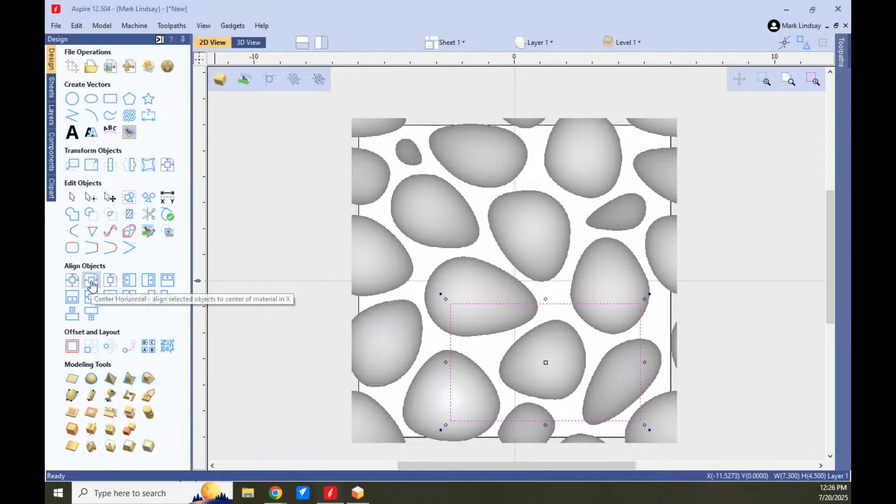Close that rectangle, and I'm going to align it to the center of my material horizontally. Now I can come down into my modeling tools in Aspire, go to the third row, second icon, to clear the area of selected components. I don't want to go outside the vector, I want to go inside the selected vector. Third row, first icon, make sure I have my rectangle selected and click that.

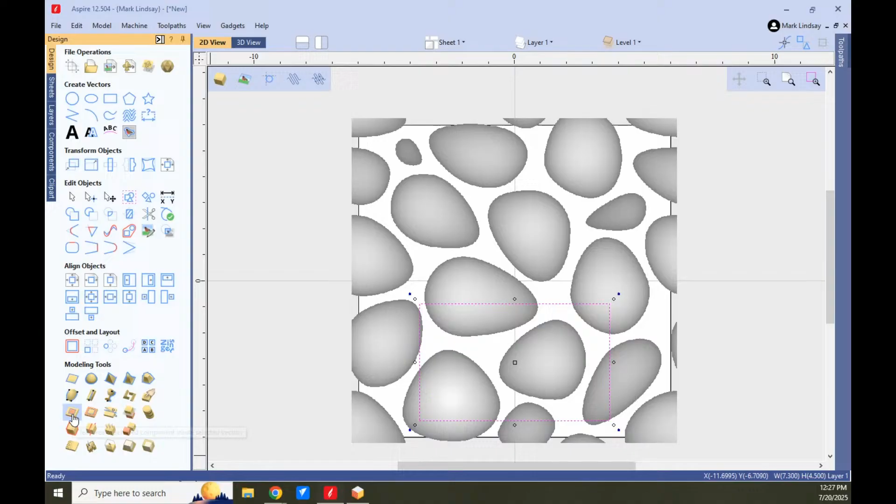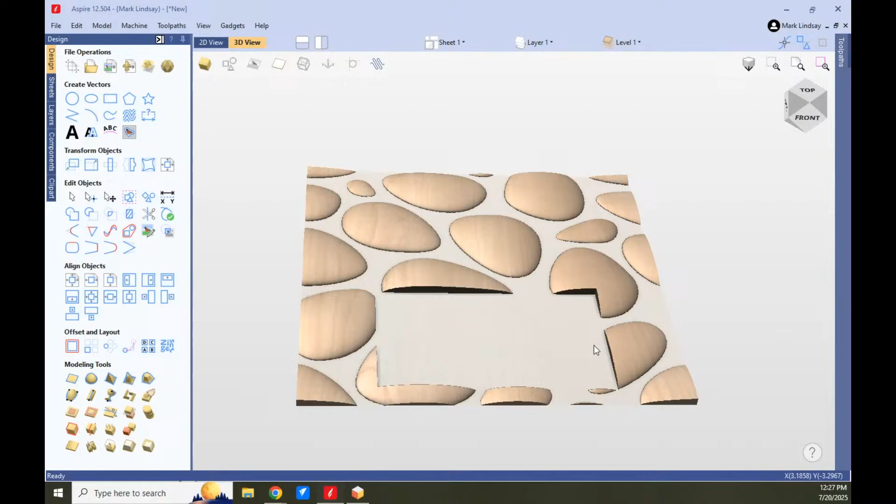I have to select the model first, then hold down shift and then select the vector, otherwise it doesn't know what to do. Then that'll clear the model inside that vector. So now when I look at it in the 3D view and turn off my vectors, that's what I've got. From here, you might want to do a little bit of sculpting to clean up rough edges, but that's how you can use a background and then eliminate a place within the model.

Now, because you're using Aspire, let's go back into the 2D view. We'll select that vector again, and we'll create a flat component here inside this vector. Let's see, what's my height here?

My height is 0.24. Let's go ahead and make this 0.25. Well, that's 0.27, that's 0.28, 0.29. Let's make it 0.29 - we'll make the base height 0.29. And we'll add, because there's nothing there, and we'll create, close.

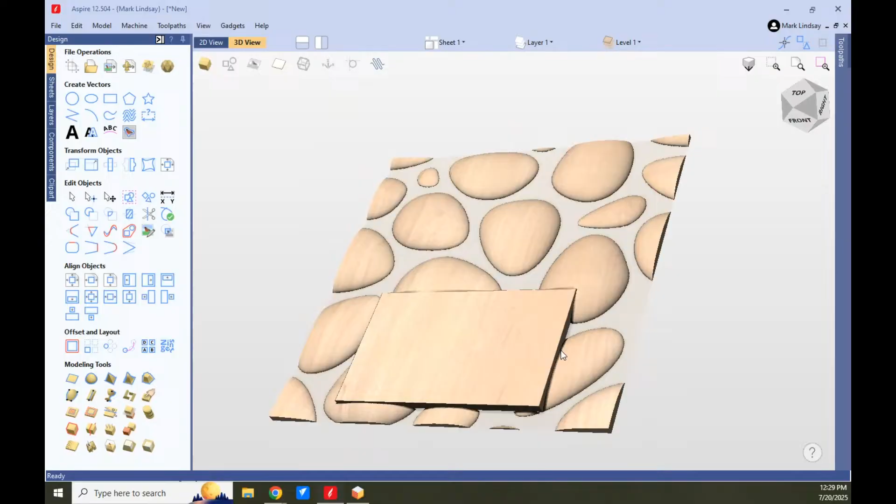Now look in the 3D view, and I have a flat area. I think I'd play with that a little bit, but you get the idea. So you could play with that to blend it in here and sculpt a little bit. I think that's what you were asking about, that's what I got from your question, but you can definitely work with that and play with it.

I see here Brooks Martin saying he likes the blue mode of view. Brooks, you come up here to edit, go down to options, scroll down to general settings here in the options, and come down to theme. You have the drop down menu here, mine is set to blue. You click the drop-down menu and they also have the white default, white/gray default. I've selected the blue theme just because I prefer it - I like the higher contrast up here. That'll get you the blue theme like I have. These icons are shaded in blue, and you turn them on and off.

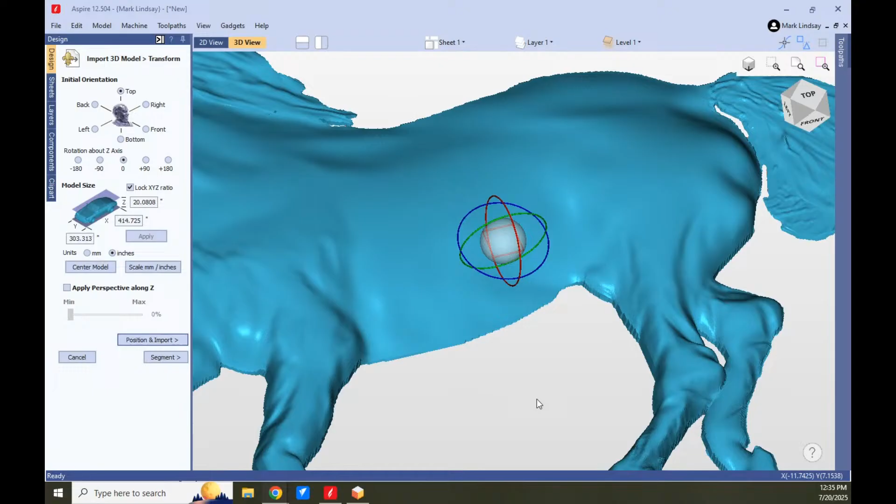So we're looking at the top surface of my material, and we can see that this horse is imported nice and flat. And that's what we want. That horse is nice and flat. We want it to be on the surface of our material.

Let's just say, for the sake of argument, the horse got imported like that. Well, now we've got to come around here and just click on these orientation points to get it to where it's lying flat and parallel with our material surface. Just so happened that our top orientation, we've got it the way we wanted it. Now if you want to fine tune that a little bit, that's when we use these rings here. I'll get into those in just a second.

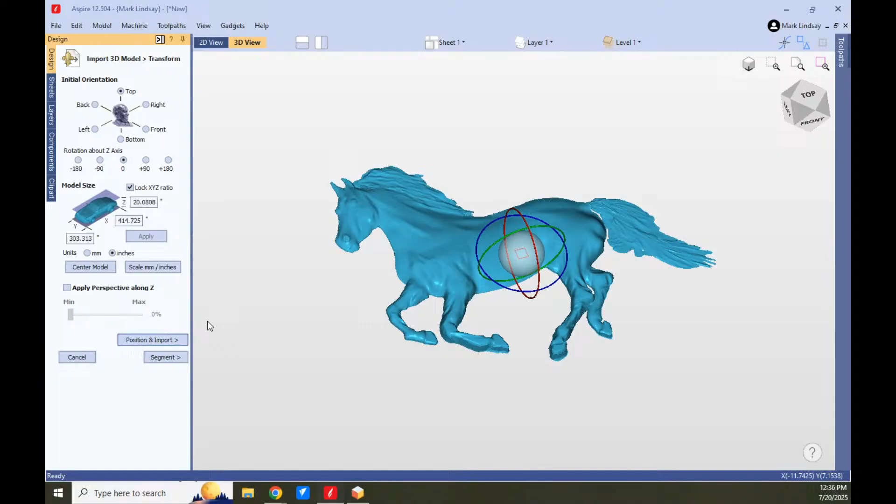The next thing you want to look at is the model size. Now we can look at this: 303 inches in Y, 414 inches in X. I can tell you right now, this was saved in metric, those should be millimeters. So Vectric knows this is a common occurrence, so they gave us a button, scale millimeters and inches. So now I just click, and we're sized. It took those measurements and we're sized in inches. Okay, that helps a lot.

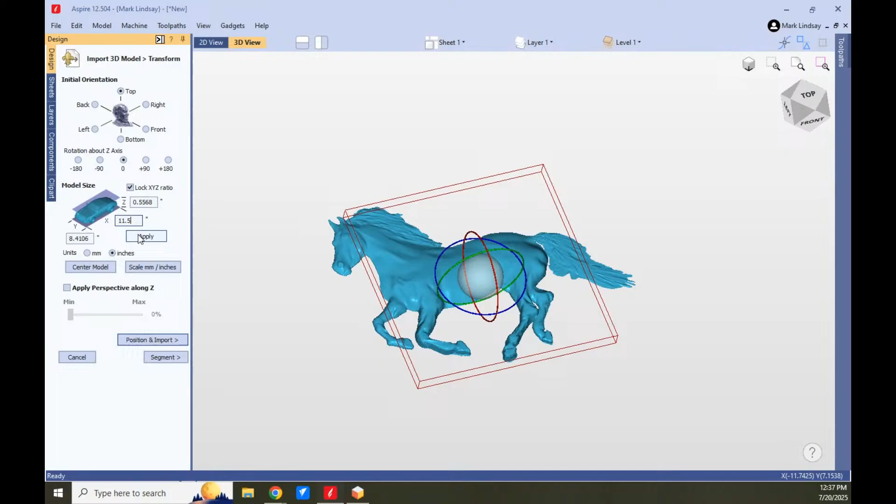Now I want to size it to where it will fit in my material block. My material block is 12 by 12. I want to make the biggest measurement down here 11 and a half. So I'll go to this one here and make this 11.5. Now that has sized everything down. I'll click apply and we have it sized to fit in my material.

Now, if I look at this straight from the top, we can see the horse is kind of rearing up a little bit, but not much. This is where we can do a little bit of adjusting here. Let's say I want that horse reared up a little bit more. I can take this ring, click on it, and drag it. And that rears that horse up just a little bit more. All I did was click on this ring and drag it.

Or I can click on that ring and enter a value here. It's currently at negative 15. Let's go with negative 20 and hit enter. That reared that horse up just a little bit more. So we've got that going, everything looks good there.

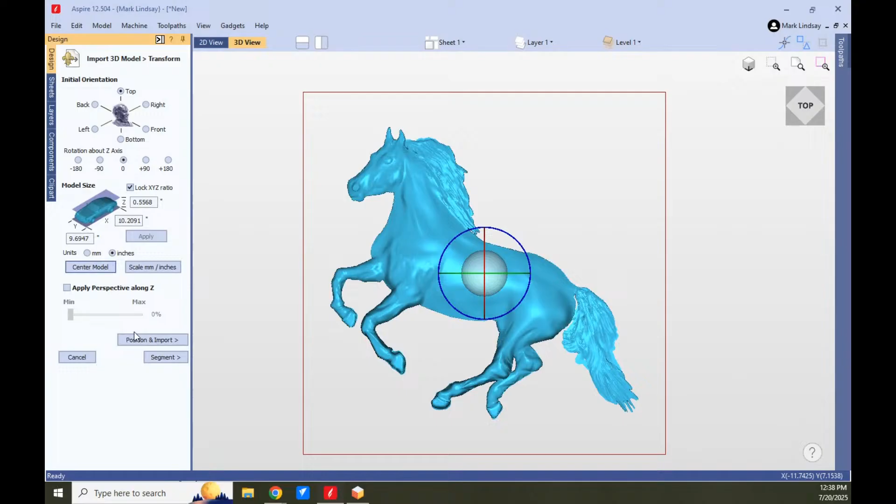My size is okay. I'm going to center the model now, and that centered him vertically and horizontally. And now I'm going to go into position and import, so I'll click into position and import. Now if I take a look at this just as it is right now, we can see that we've got some bright blue in focus.

Then we've got this purplish gray plane right here. In this view, they're calling it a zero plane. This is technically the modeling plane. This decides what is going to be imported, what's going to be visible. We can see over here in this diagram it is, by default, set that plane to the center of the model because it doesn't know what we want to import. I'm going to drag this all the way to the bottom so that my model is above that plane.

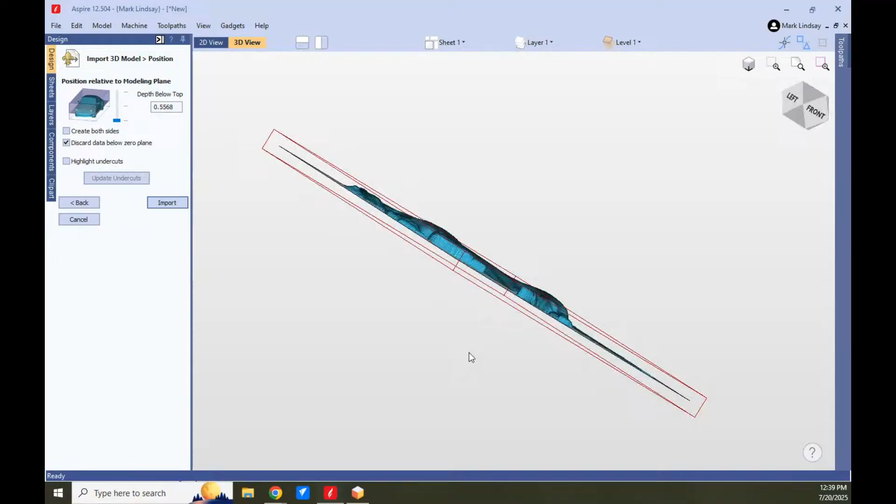Right now, it doesn't matter if that model appears to be thicker or standing proud of this material block. That's fine, we just want all of this model imported into the software. Now, you might not want to import the whole model depending upon the model and what you want. Go back to a top view here. So I've got my modeling plane here, all the way down to the bottom. I don't need to create both sides. I want to discard the data below the zero plane. If there's any portion of the model below this, I want it discarded, I don't want it imported.

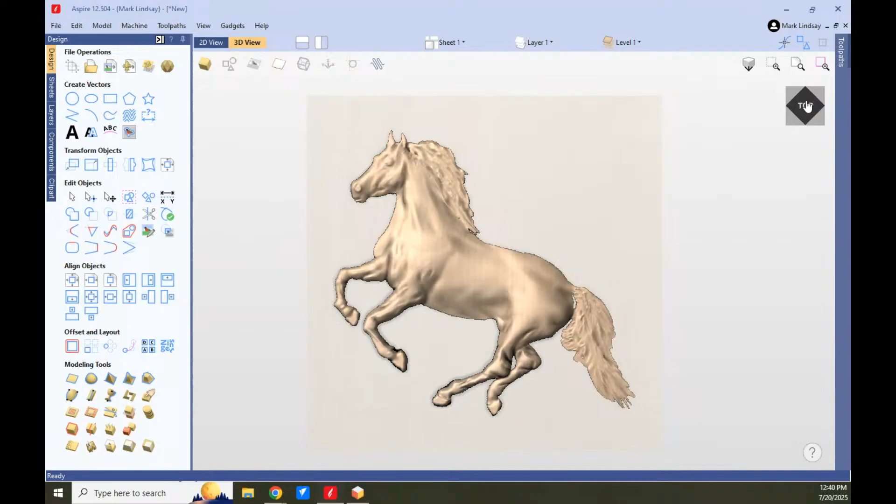Highlight undercuts. There are no undercuts on this particular model. Now I can just click import, and that's going to bring that model into my software. And there it is, imported at the proper angle. It's rearing up the way that I wanted it.

And everything is fine. I hope that answers your question. And it doesn't matter where the model came from. If it came from VistaSculpt or another source, it's a straight up STL model. That's how you import it into VCarve or Aspire, either one, and you have all those options available to you.

Now, Ed Appleton asks, in Aspire, when you bring in an STL that was created in VistaSculpt, are you able to modify it? Yes, you can. I know in VCarve Pro, you cannot. Thinking about upgrading to Aspire.

Okay, let me throw you one question, Ed. How often will you realistically use it? See, I'm not one of those people that automatically says yes, you need to upgrade to Aspire, because I don't know how you're going to use it. Only you know how you're going to use it. I can tell you a few things or possibly show you a few things that might sway your opinion. But at the end of the day, it's a large amount of money and it's your money. I'm really good at spending other people's money, but generally speaking, I don't like to do that.

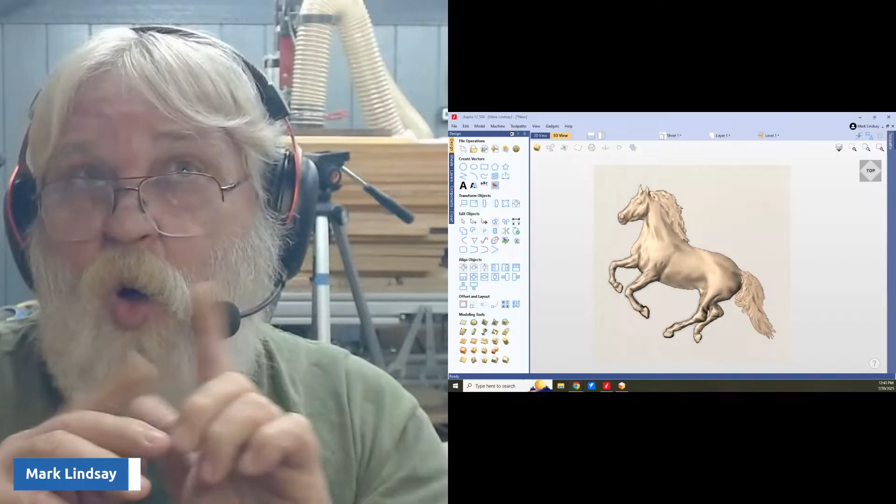But if you have a slight outward angle in that mold, the pieces are easier to pull out. So it's almost just exactly the opposite of a V-carve, but that's kind of what it looks like when you make that mold. You're going to make this model with a slight angle outward at the bottom, and that's going to smooth in a lot of areas. Let's get back over here and I'll show you what I mean.

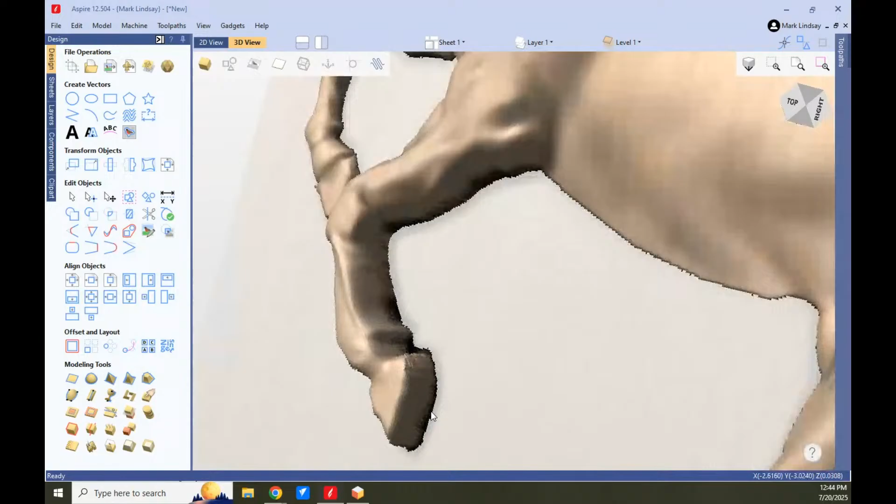If we come to, let's see, I saw them in the preview. Well, there's some rough edges right there that are kind of ugly. And here's some rough edges here that are very ugly, that stand out as being ugly. Part of that is my modeling resolution. Part of that is just the model. It has something that goes straight up and down, being the hoof.

This is what I'm going to show you right now, Jim Brown. What we're going to do is we're going to select that model. Let's take a look over here in the component tree, and we see one, horse A. Let's go back over to the design tab. And now with that model selected, I'm going to click on this one. And it's asking me, how much of a draft angle do I want to add to that model?

Doesn't need much. Let's go with 4 degrees. So I'm just going to highlight here, I'm going to tap 4.0. It doesn't need much. Then I click Apply. Now I'm going to go back over here to the component tree, and now I have my horse, and now I have the model with the 4-degree draft.

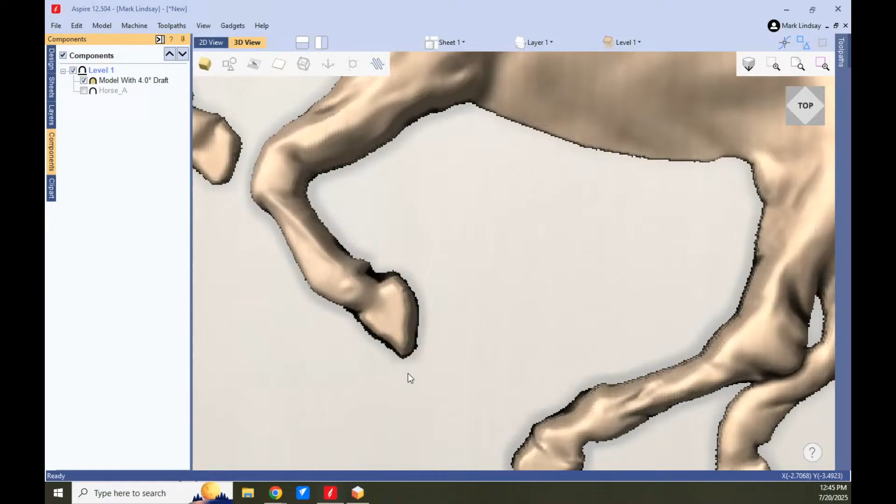I'm going to turn off my original model, and now we'll zoom in here for a look. My modeling resolution still sucks, but it has cleaned up the edges quite a bit. Might need a little bit more draft, and I think most of this roughness is my modeling resolution, because my modeling resolution is very low, because I didn't set this up for 3D modeling. Let me go back here and see what it is. Oh, close. What is my modeling resolution? Yeah, I'm set real low.

So adding draft, what it does, it doesn't modify this model. What it modifies is it makes a new model and incorporates that draft.

So let's go back over here and let's turn my original horse back on, and I'm going to delete that with the draft. Because 8 Center has a good question here. Can you define draft, because I'm a bit lost.

Let's look at something close up. There I have a straight down vertical edge. I also have them back here and out here. Again, my modeling resolution sucks. But if I come in here, let's go with an extreme level. Let's go with 25 degrees.

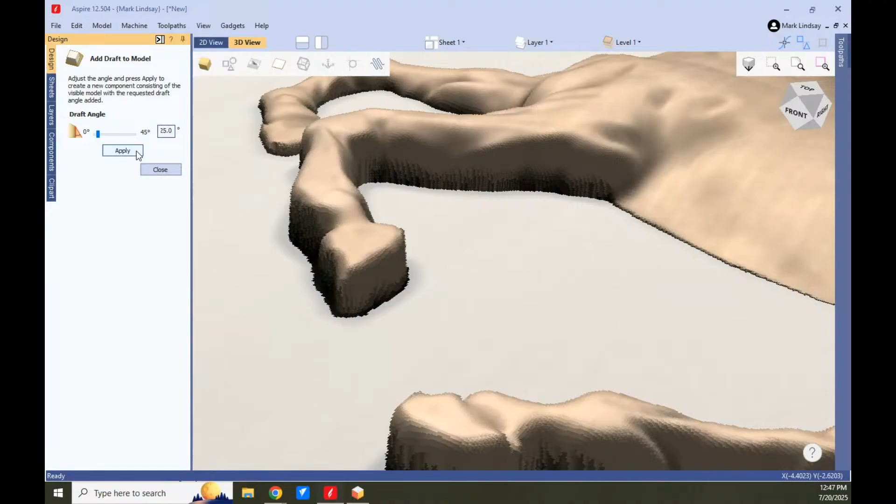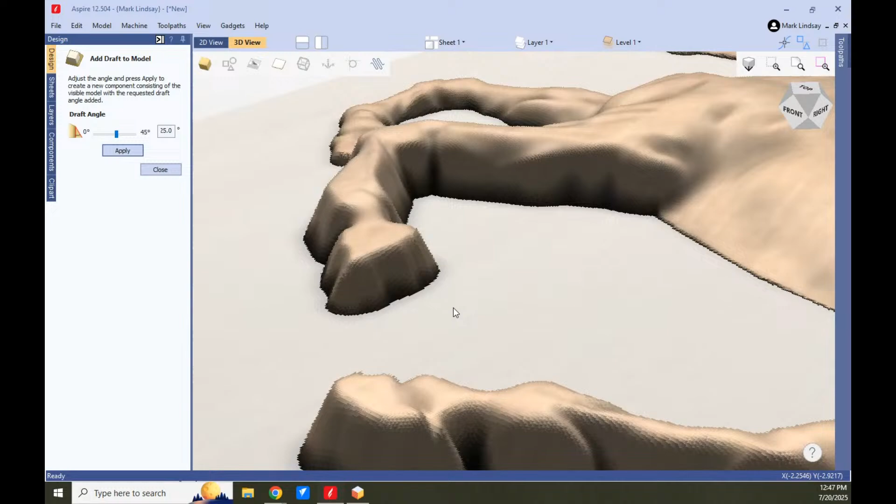So it will show you exactly what it does. And let's click Apply. You see how the base grew and it added that angle, so it's no longer straight up and down. That is adding draft. Basically what it does is it takes those straight down vertical edges and it adds a bit of an angle to them so they're not so straight up and down.

Now, that was too much for this model. That really looks odd.

So what Kurt is asking, is that cumulative? No, it's not cumulative. In order to change this, I now have to close, go back over to the component tree, and I have to delete this because it created a whole new model with that draft added. And John has the better way of describing it.

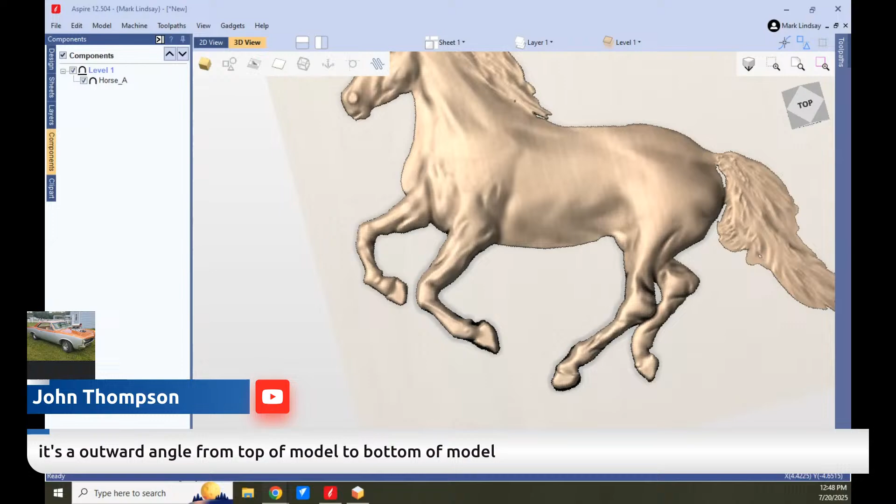Draft is an outward angle from the top of the model to the bottom of the model. And yes, it is very beneficial when carving with a taper ball nose bit.

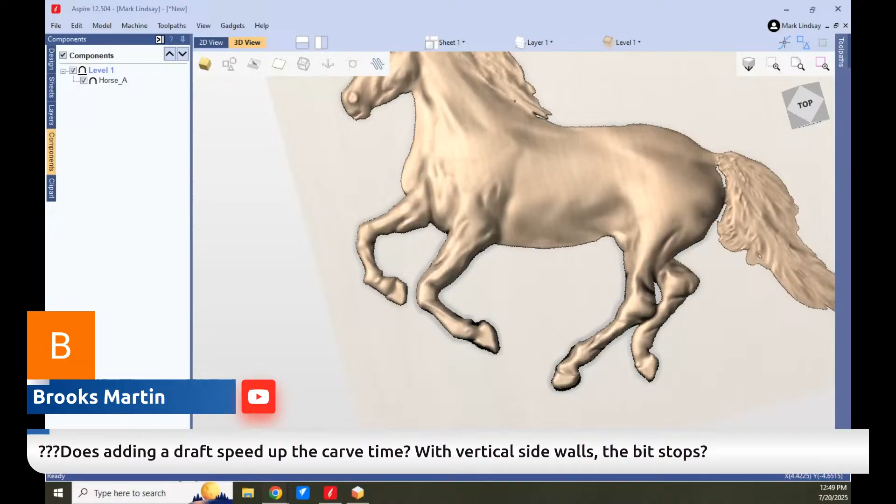Does adding a draft speed up the carve time? With vertical sidewalls, the bit stops. It can speed up the carve time, but I think its effect on the carve time is minimal. I don't know that you'd even really notice it. The plunge rate of your bit has more of an effect than draft does. Adding draft just makes it a little bit more aesthetically pleasing, depending upon the model.

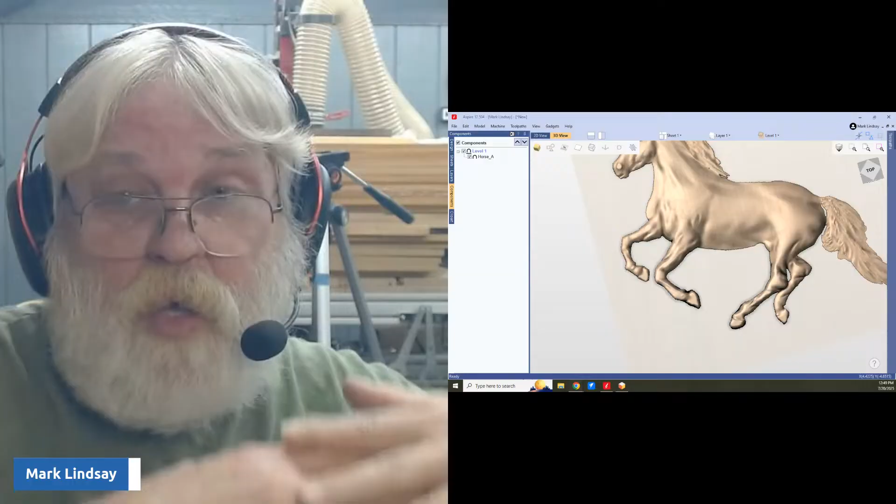But generally speaking, that's done at the end of the modeling process. You get the model built the way you want it. In this case, I have just this horse here. That's my only element in this composite model. So adding a little bit of draft to it, it may reduce carve time in some ways, it may increase it in other ways, just depending upon the model.

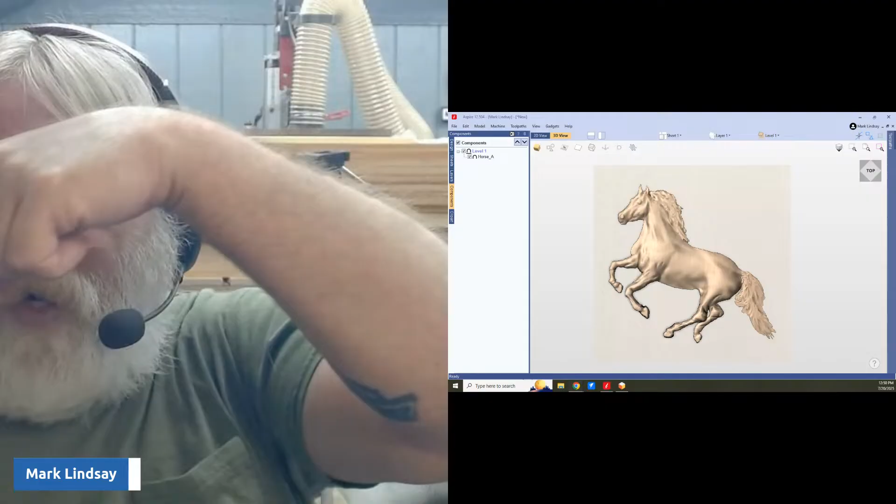Okay, here, 8 Center's asking, I would imagine it mostly slows carve time using a ball nose bit. That's debatable. I guess it really depends on the model and how much draft you add. But a bit that has to move up to an angle and stop, then retract, then continue on, is going to move slightly slower than a bit that's moving along and then gradually climbs and then goes back up and then gradually decreases. For that reason, I use 3D tabs when I use tabs, because the axis doesn't have to stop and do that retract and then move over and do that plunge. It never stops moving.

And that is true. Not if you have your plunge rate turned up. When you are doing a finishing toolpath, at least me anyway, if I have done a roughing toolpath, I will turn the plunge rate up on that bit to where it's equal to my feed rate, because the CNC router is always going to move at the rate of the slowest axis. So if your plunge rate is 20 inches per minute, doesn't matter what your feed rate is, that machine is going to move at 20 inches per minute.

But presumably, if the plunge rate is too high, you'll get burn marks if it's too high. That's why it's important to do a roughing toolpath first. If you do a roughing toolpath, you're only leaving a thin skin for that finishing toolpath to remove. I set, for instance, on mine, I set it to where I've only got a thin skin of 30 thousandths of an inch of material to remove with that finishing toolpath. The rest of it is cleared out by the roughing toolpath.

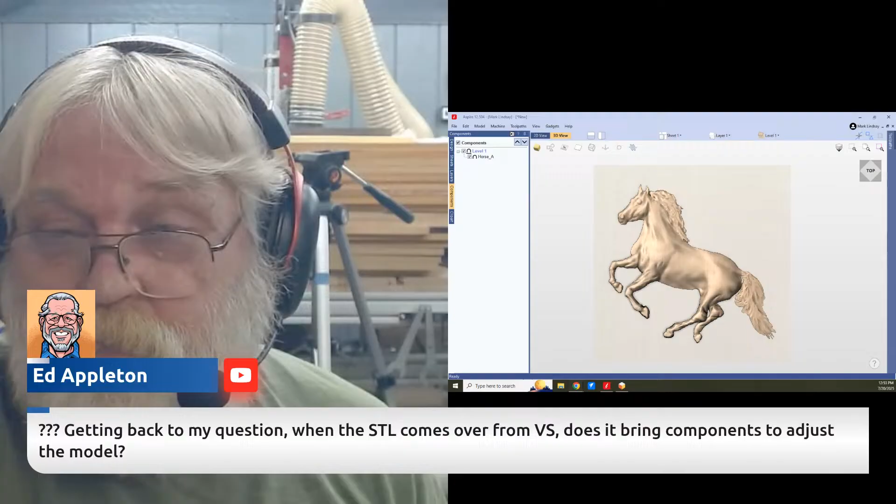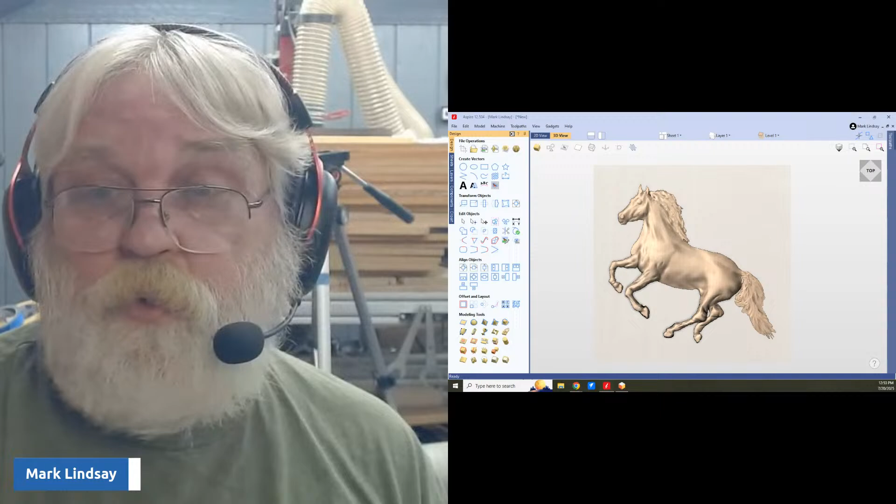You can adjust all kinds of things. You can adjust the base height, you can adjust the shape height. You can get into, let me bring this up full screen again, your sculpting brushes down here and clean things up. But fair warning, sculpting is an art in and of itself. I am no good at it. It's a talent that has to be developed.

Jim Brown is asking, if your model has a background, can you remove the background? Yes, you can. What you'll need to do is trace the elements that you want to keep. That may mean freehand trace, or that may be bitmap tracing.

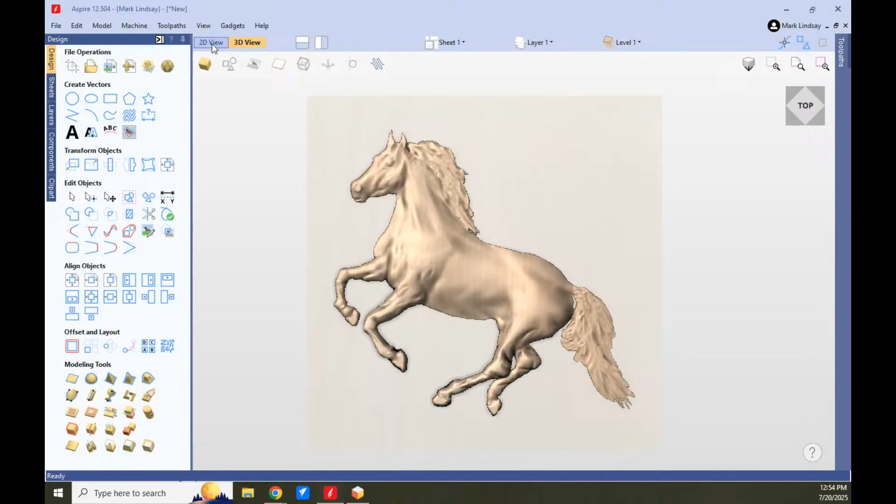Get into the 2D view here. You'll have to get in and trace around this. If you have a background, your background will be part of the model. You'll have to get in and trace around it, then select that vector, or those vectors in the case of any little inclusions. Trace those vectors, then select the model, select those vectors, and you'll want to clear away anything outside of those selected vectors.

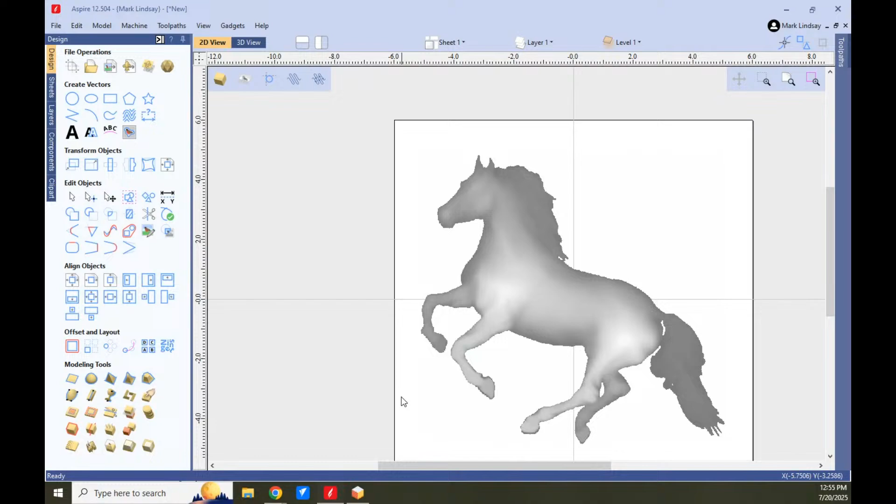Generally speaking, however, if you're using VistaSculpt, when you generate the image or load an image, you have an option right down below Generate Image to edit that image. There's a background remover tool in that edit image. I'm using the demo, so I don't have that available to me. Use that background removal tool, and that will remove the background from your VistaSculpt model.

I find that with VistaSculpt, if you're working with a car, truck, or airplane, anything that you want to feature where the background isn't important, I will remove the background out of anything like that. If there's an element of that background that is important, a person, a thing, a feature—if you're taking a picture of an airplane flying past the Eiffel Tower, for example, you want the Eiffel Tower in there, you want the airplane in there—then I wouldn't remove the background.

But if it's just, say, I've created an image of a pickup truck and that's all I'm interested in, then I'm going to eliminate the background in VistaSculpt before I even come down here and generate the 3D model. I'm going to edit that image up here.

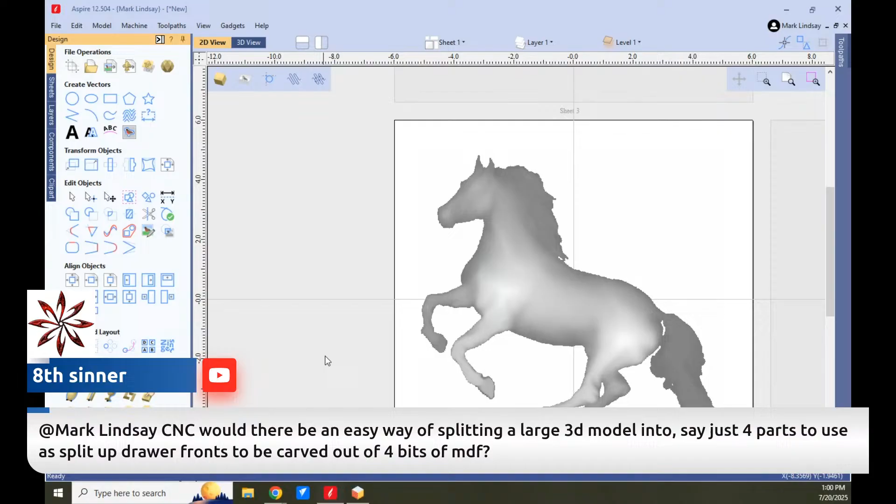Now, while that's generating, let's jump over here. In Aspire, I can come over here to Sheets, and I'm going to add 2 more sheets that are identical. Come back over here to Design. So I have 3 sheets. I can click on that model and copy to sheet 2 and sheet 3. So now I have that copied onto 3 different sheets.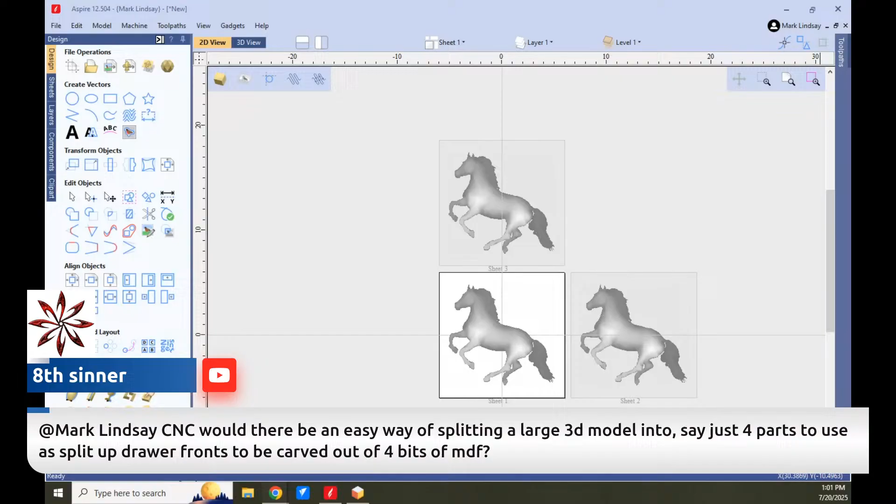Can that be done in Aspire? Or excuse me, can that be done in VCarve? And here's what I'm asking, because 8th sinner brings up an interesting question. We're talking about a case of splitting a large 3D model into, say, just 4 parts to use as split up drawer fronts. So the drawer fronts lined up horizontally would be split up across the drawer front, so it would look like one image going across.

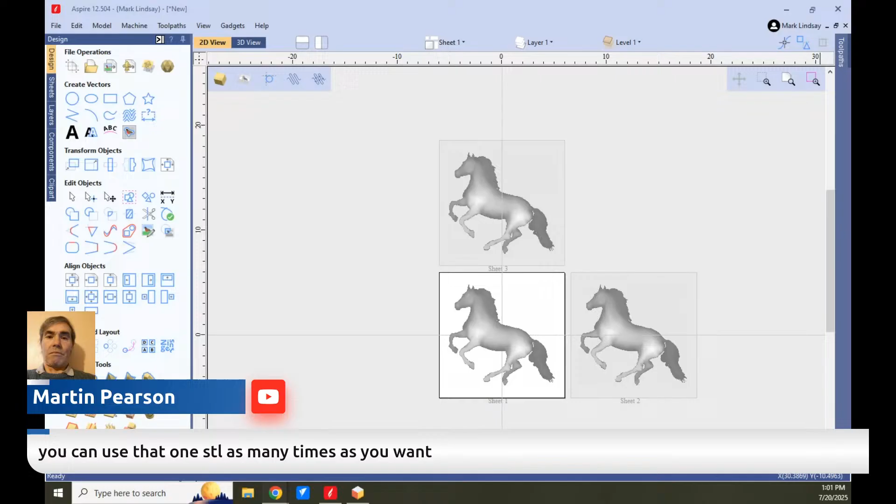That's interesting, 8th sinner. Now, Martin says you can use that one STL as many times as you want, so it will copy over to a new sheet. Okay, good. So you could definitely do it in Aspire. I'm wondering, can you do it in VCarve?

Because let's say it's not an STL, but let's go with the design and make clip art. We have the... where did I put it? Maybe it's in here. I didn't think it was. Yep, there it is, wildlife scene. I've got this scene here of mountains.

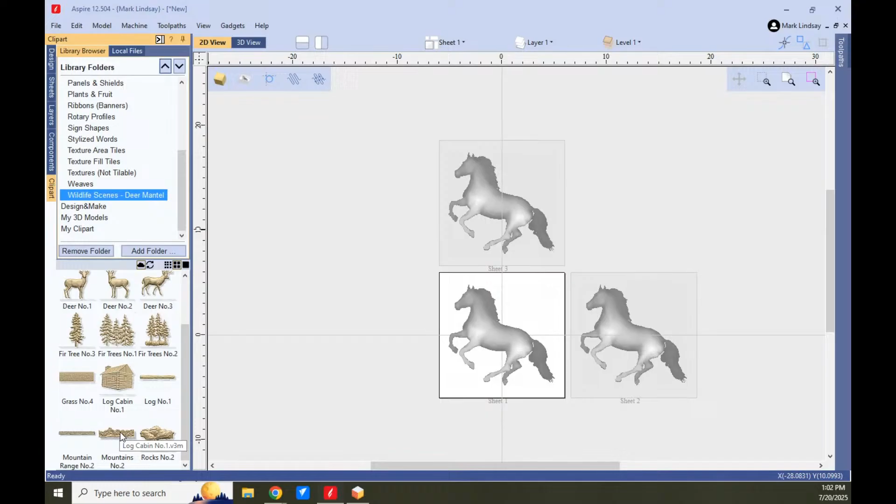Now let me bring that up here. I could put this section of mountains on that sheet, on this sheet, and then this section of mountains on this sheet, and then the last section of mountains on this sheet, so that when I put them all together, it would look like those mountains were going across all 3 drawer fronts on my cabinet.

Now, I can definitely do it in Aspire. Can I do it in VCarve? So, okay, my idea is a large dragon, Rosenberg type dragon image, but split into something like 70 drawer fronts. But if the principle is easy enough, the potential is endless.

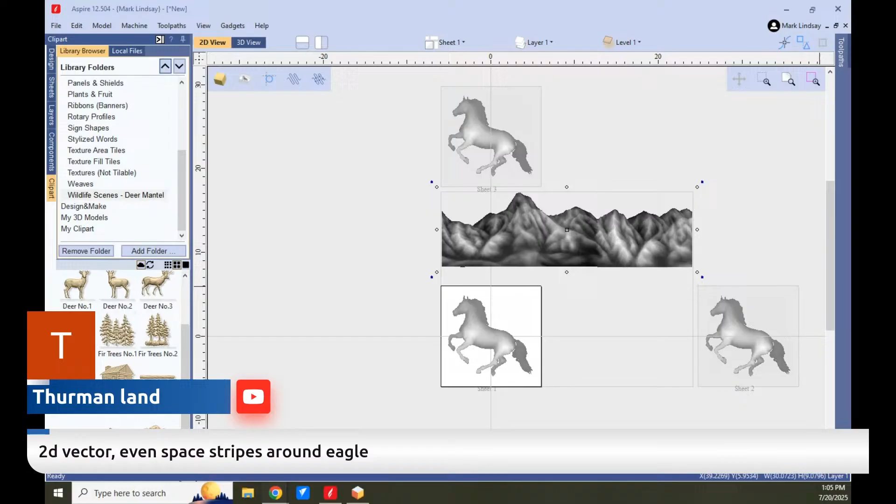Or 2D vectors, and Thurman did say 2D vector, even space stripes around the eagle. Okay, what you would do in this case, Thurman, is select all the stripes. Come back over here to design so I can show you while we're here. Select all the stripes. Then last, select the eagle.

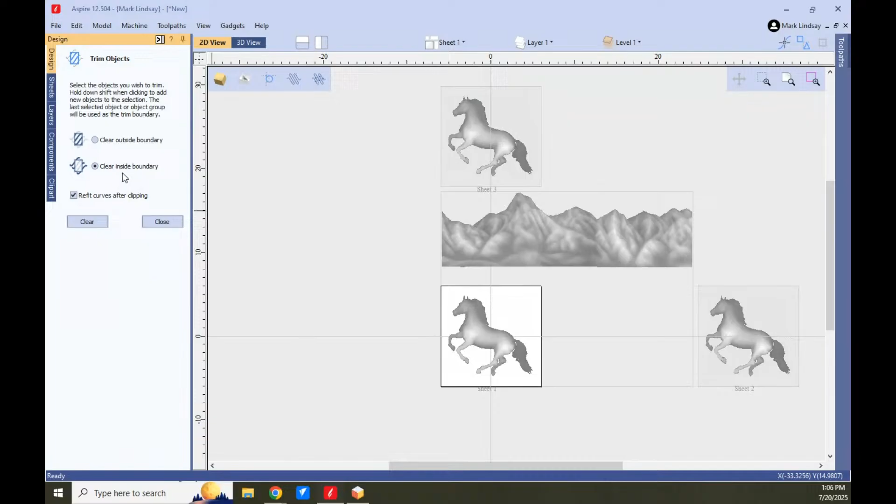Then what you would do is come over to, let me find it, this icon right here, trim selected objects to the last selected objects. You'll click on that. You want to clear inside the boundary, so all of the stripes that are inside that eagle will be trimmed away. That's all you have to do, it will do everything else. Just select all the stripes, then select the eagle, and it will clear inside the boundary. Everything inside that eagle will be trimmed away. Okay? That's a very common situation, and it's very simple.

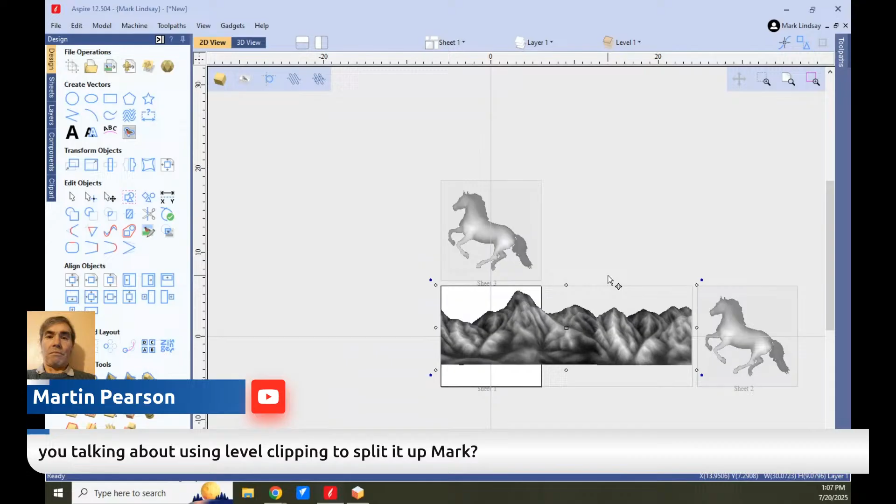You talking about using level clipping to split it up, Mark? No, actually, Martin, what I was talking about was, let's take this out of here, come on, let's delete that horse. Boom. Now I take this model, come on, and I just drag it down here, like so. Now, if I look at my 3D view, that's the only portion of the model that's being used right there. Okay, now let's go back to the 2D view. And I'm going to hold down Control, and I'm going to drag a copy of that up here.

And I'm going to move it. Oops, let me get rid of that. Double click to get into sheet 2. Boom, delete. Now I'm going to move... oops, that's part of sheet 1. Let me go back to sheet 1.

Move that copy to... how come I can't move it? Oh, I got to select it, that's why. Right click, move to sheet 3. Boom.

There we go. Now when I go into this sheet, I can drag it so that the next portion of the mountain is here. See what I mean?

Yes, but that won't work vertically. It would take a little bit of...

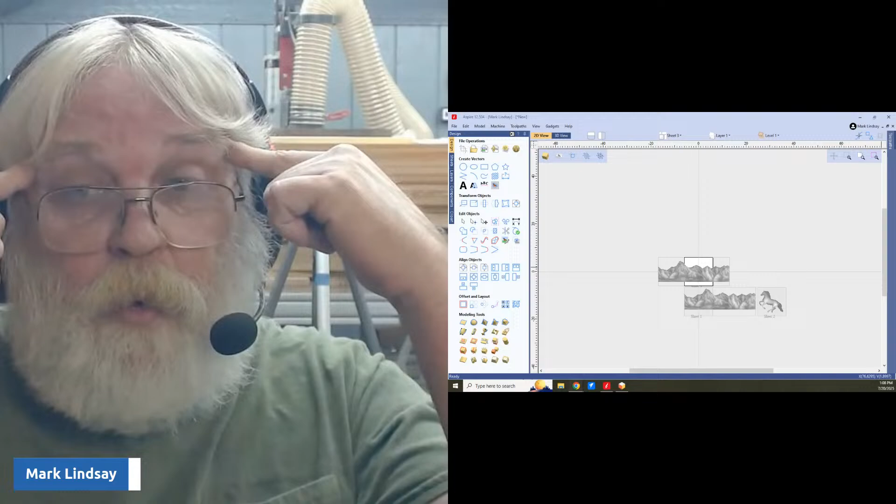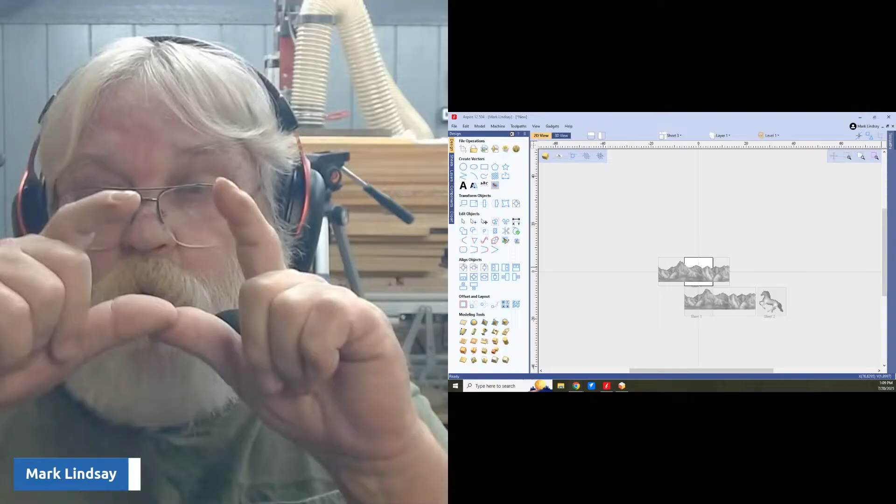Here's what I'm thinking, Martin, and maybe you can correct me. This is the way my brain works, maybe I'm completely wrong. What you would basically do is you would divide up that model into a grid that reflects the sizes of the drawer fronts that you were going to carve. And then move the model vertically or horizontally, whatever, so that this particular sheet, each sheet is sized to a drawer front. And you would move that model to where that part that you want is centered over that.

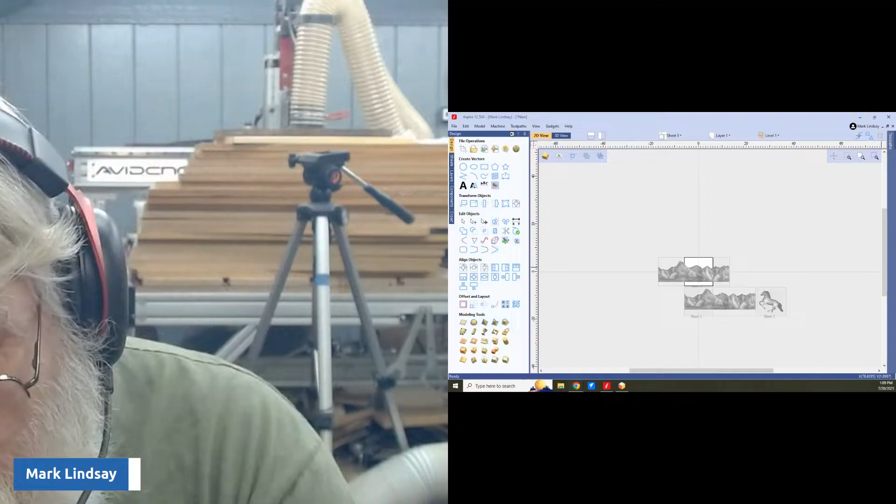Or in Aspire, you could actually dissect the model.

I'd copy a vector of the outside border of sheet 1 and copy both to the other sheet. Yeah.

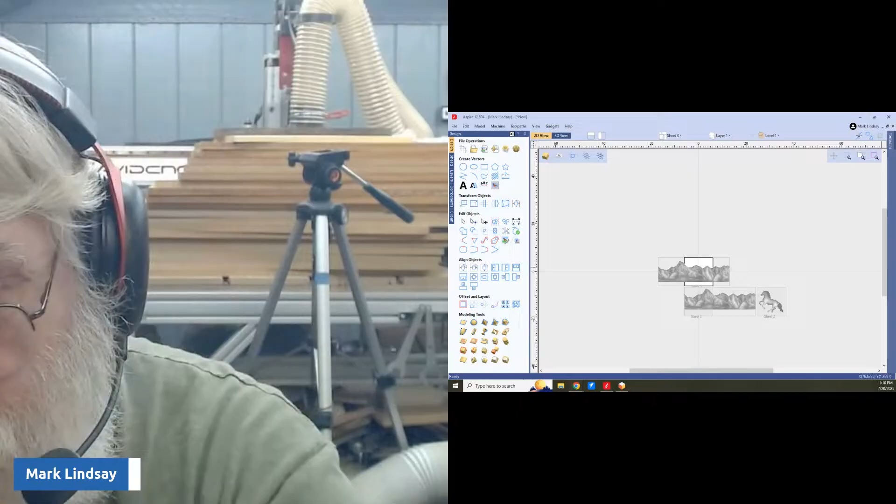There are many, many ways of doing this. Basically, what you're doing is you're dividing up the model over each of the sheets that you want to carve. But it would be a lot of work, because that's a lot of different cuts to make.

So, yeah, but does this make sense? So that on this sheet, I have that section of the mountains, then go back to sheet 1, and I would have that section of the mountains on sheet 1. Does that make sense?

Ultimately, is it easier in Aspire? I don't think so. I think there are some things you could do in Aspire that can't be done in VCarve, obviously, but in this case, I don't know that it would be easier.

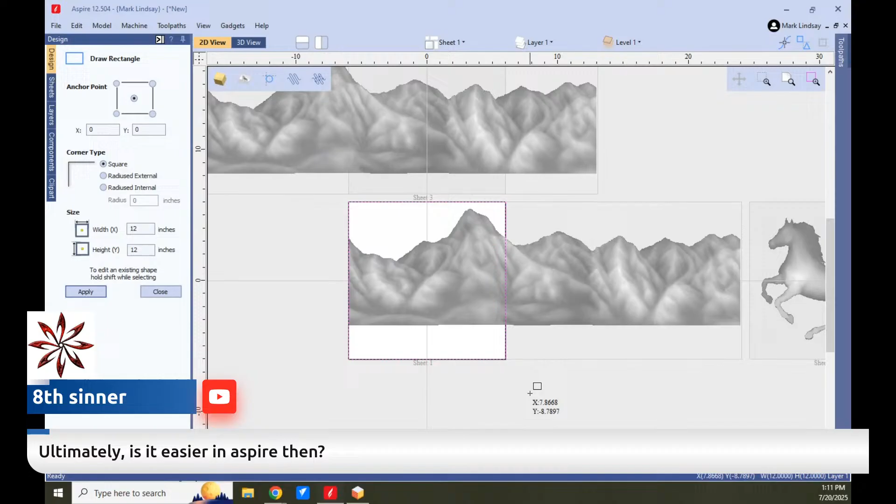It would just be different, because, for instance, what you could do—let's go here, and I think you can do this both in VCarve and in Aspire. Okay, but let's take a look. You could come here, draw a rectangle the size of your material. Boom, okay, then close that.

You can select—and I think you can do this in VCarve too—select the model, hold down Shift, select the vector. You can't do this in VCarve because you're getting rid of everything outside that vector. And boom, that's gone.

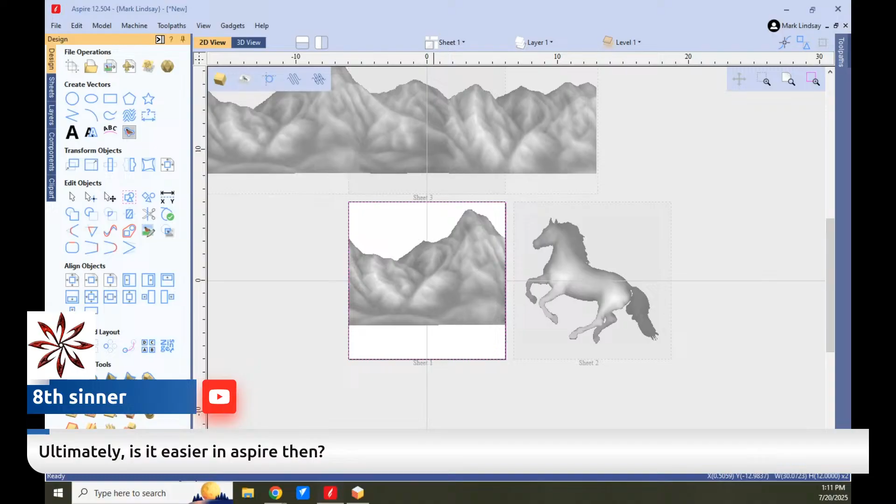So now what you would do, go into sheet 3, and this again is my brain on Mark. I would draw another... no, come on, snap it to the edge. There we go, draw another rectangle the same size as my material. Boom.

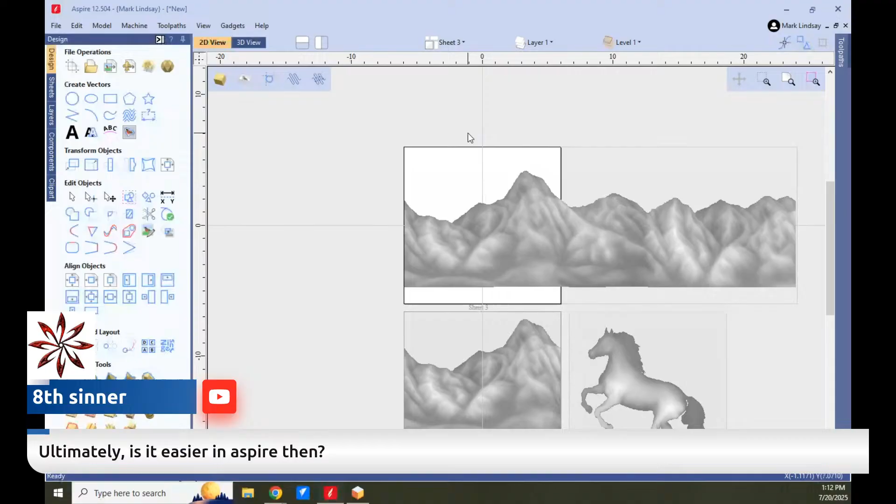And now close, select that vector. Hello, I drew a rectangle. There we go.

Close, then hold down Control, copy, snap to that original one. Come back here, select this one, delete—whoop, Control Z. I just want to delete that vector. There we go.

Select the model, hold down Shift, select the vector, clear everything outside. Control Z, select the model, select the vector, delete everything outside.

Why are we not doing what I want to do? Why are we not doing what I want to do?

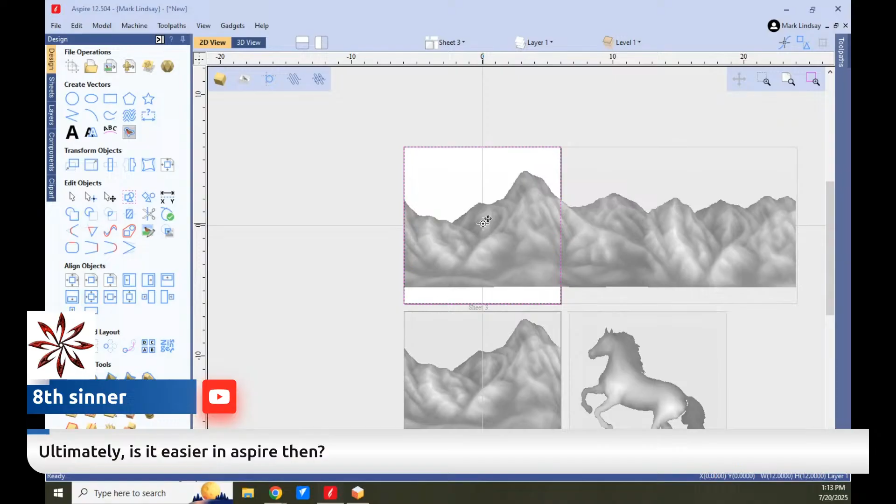Back here. I should be able to select the model, hold down Shift, select the vector, and clear everything outside of this vector. And it deletes the whole model. Okay.

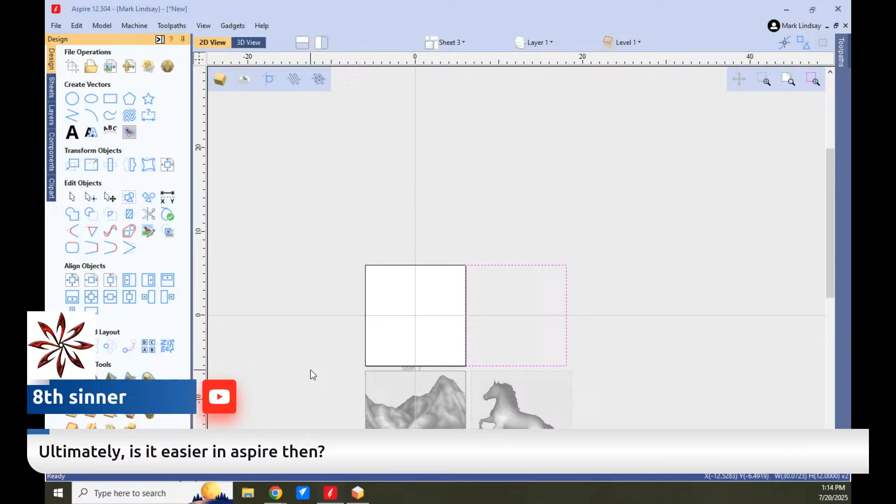Control Z, let's try something else. Let's get rid of that vector. Now I'm going to select everything, and I move it until that is lined up there. Let's try that.

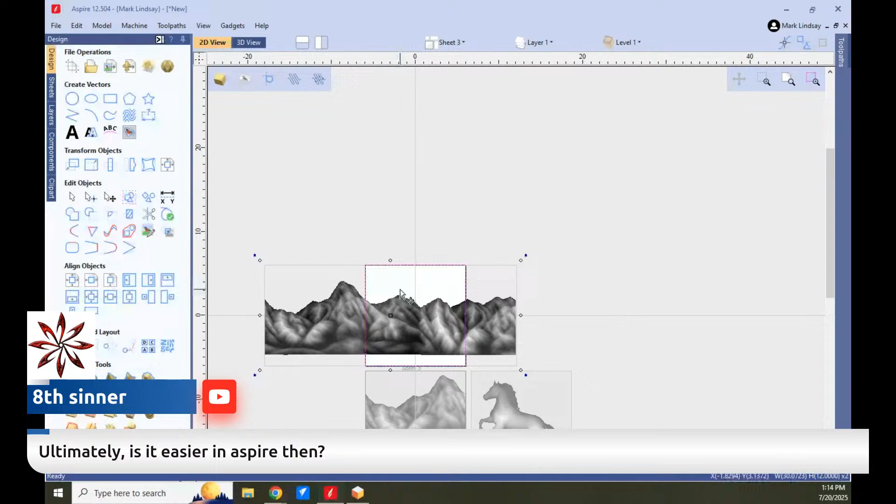Now, there we go. You had to move everything. Okay. Yeah, not when it's outside the work area. Okay, thank you, Martin, that's where I goofed.

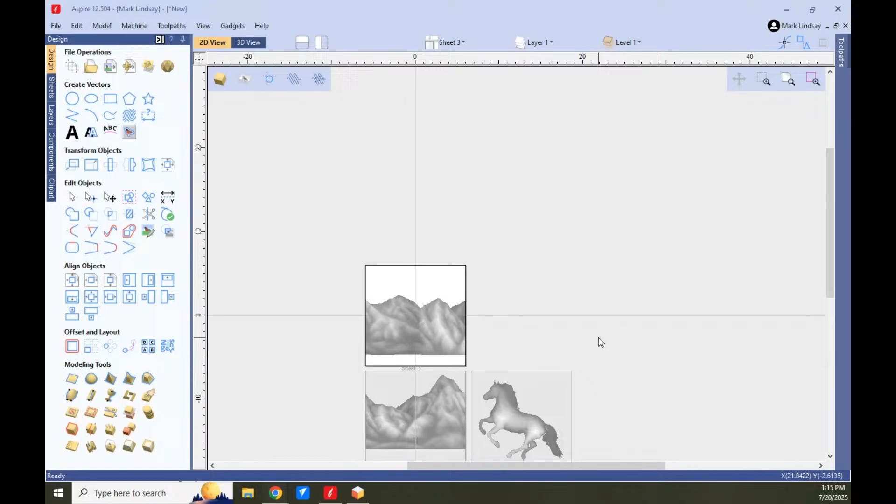But you see what I'm getting at. So now when all these are lined up, when these two are lined up, because it's not long enough to make three of them, when you place that one over here, back to here, let's do this.

Let's go into Sheets, and we'll eliminate Sheet 2. Delete. There we go. That's basically pretty much how they would lay out.

I didn't know you could align and set up sheets in a specific order like that. It takes a little bit of playing around, a little bit of doing, but you see what I'm getting at.

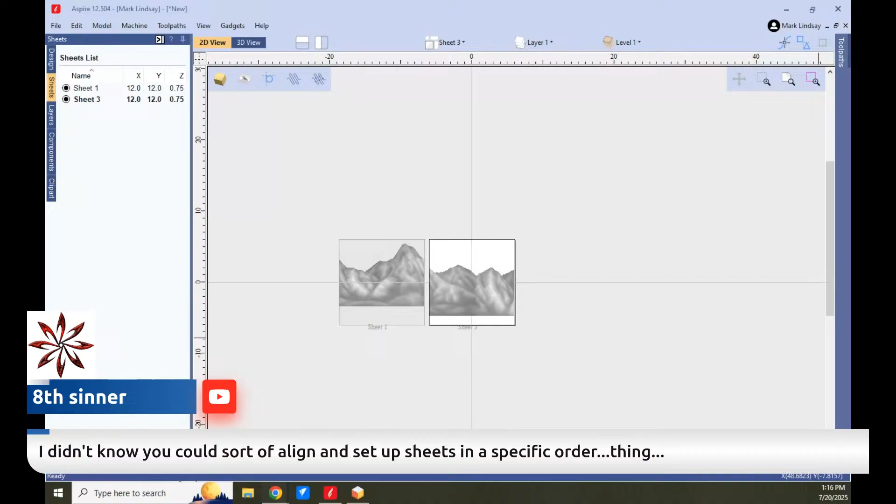So if you wanted to create all of your drawers across the front of a cabinet bank, or your desk, imagine a desk where you have the tops of the mountains across the top three drawers, then two drawer banks down you have the bases of those mountains, so it looks like the knee hole is surrounded by these mountains. That would be pretty cool.

Boy, did we ever get off on a tangent. But thank you for that tangent, I like stuff like that.

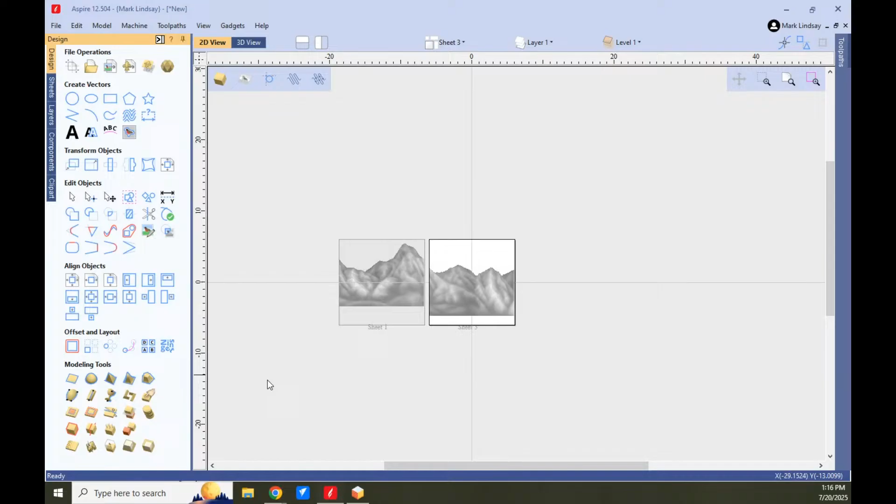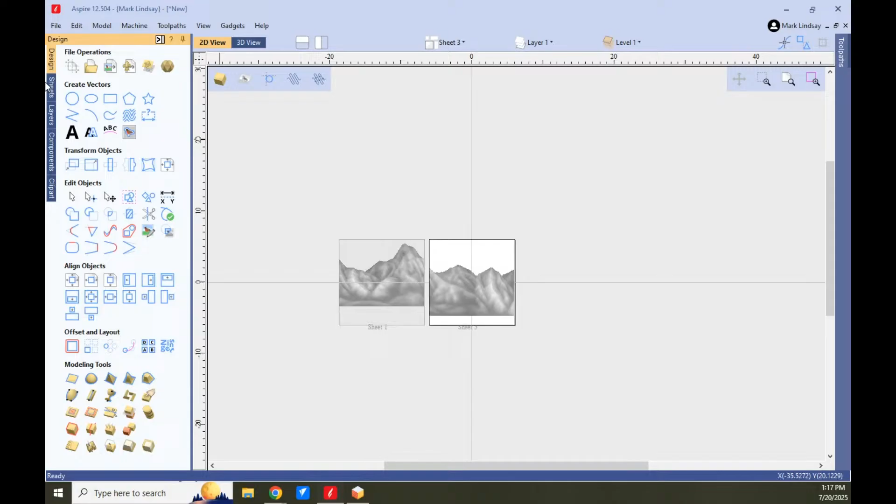This is something I'm going to have to explore further in VCarve and Aspire to see if there's an easier way of getting this done. But we've seen that it is plausible. Having said that, the one thing that made this possible for me was this button here in Aspire. In VCarve, you'd have to do some creative level clipping, and that's a whole other topic. Let me play around with this idea, and we might end up doing something another day in another video. I love it when you guys give me these kinds of things, because I honestly never thought about doing something like that.

Or cut it out of one big sheet with the whole image and cut out the drawer front. Yeah, you could do that too, but that's kind of cheating, you know? But I get what you're saying, Brooks.

Because when you think about it, Brooks, now that you bring that up, this is why I love you guys. The normal gap on a frameless cabinet, when you've got full overlay drawers and doors, is 1/8 of an inch. So the gap between this drawer front and this drawer front would be about the same as the kerf on a table saw blade.

Just saying. Just saying. Y'all are great.